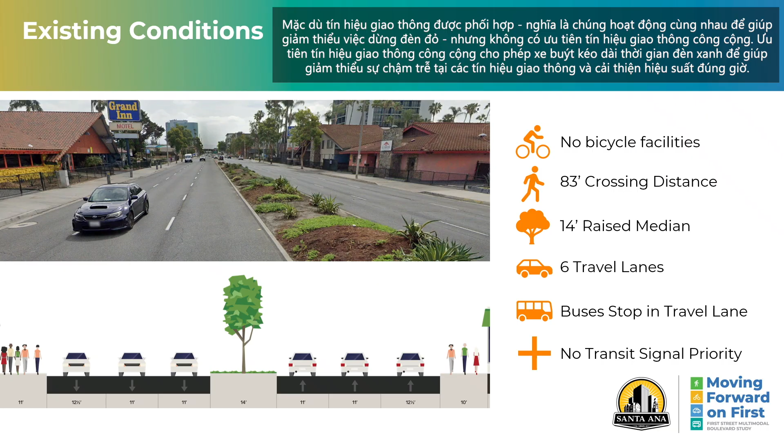First Street today is a highly auto-centric corridor. With approximately 83 feet curb to curb, there are 6 vehicle travel lanes, a raised median for much of the corridor, and sidewalks on both sides of the street. There are no bicycle lanes or facilities for bicycles. Therefore, the outside lane on First Street is currently shared by autos, bicycles, and buses. And while traffic signals are coordinated, meaning that they work together to help minimize stopping at red lights, there is no transit signal priority. Transit signal priority allows buses to extend the green light to help minimize delay at traffic signals and improve on-time performance.

Now let's look at how people travel along the corridor. Like much of California, the majority of the people who travel along the corridor do so by car. Data collected in March 2025 indicates between 20,000 and 36,000 vehicles per day travel on First Street, with the highest volume near Main Street and the lowest volume near Tustin Avenue. Posted speed limits along the corridor range from 35 to 40 miles per hour, and during the peak hours, travel speeds are at or near the posted speed limit. However, in the evening, speeds do tend to increase.

OCTA Route 64 is one of the highest ridership routes in Orange County. Based on information collected in 2024 and 2025, up to 2,900 daily boardings occur within the limits of the study area, with the highest boardings occurring in the westbound direction. Throughout the day, you will see people walking and bicycling along First Street. A review of origin and destination data for the corridor indicates that 30% of the trips made by people who live or work near the corridor are made by walking.

Bicycles account for approximately 250 trips per day along the corridor. During the data collection period, however, 85% of the bicyclists observed were riding on the sidewalk, indicating a safety concern relative to riding their bicycle in the street. And while accident rates are fairly low on First Street, pedestrian and bicycle-involved collisions account for 23% of the 479 crashes recorded across an 8-year period.

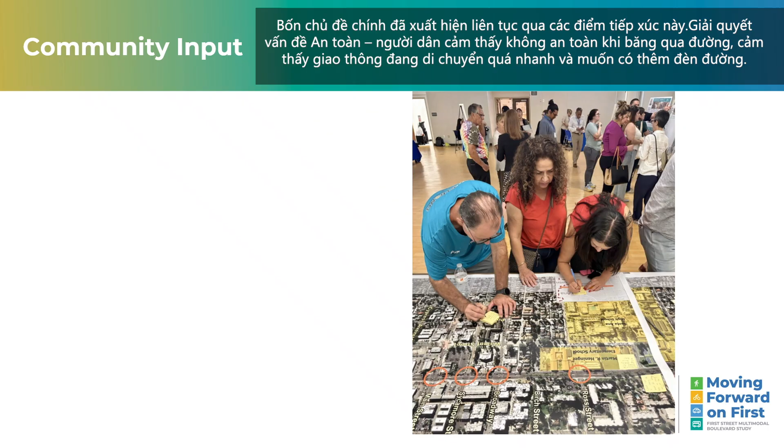Community engagement began in August of 2025 and is a key part of this project. Since the initiation, we've had 2 sets of in-person workshops, 1 virtual online workshop, attended 3 pop-up events in the community, and have initiated discussions with stakeholder groups. Consistently throughout these touchpoints, 4 key themes have emerged. First, safety. People feel uncomfortable crossing the street. They feel traffic is moving too fast, and they'd like to see more street lighting.

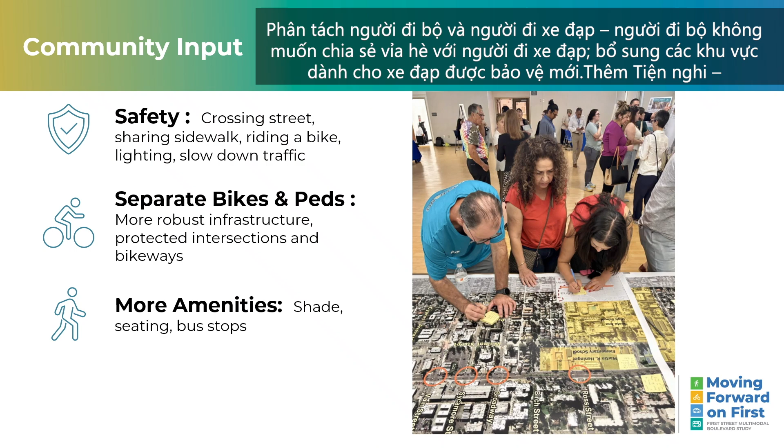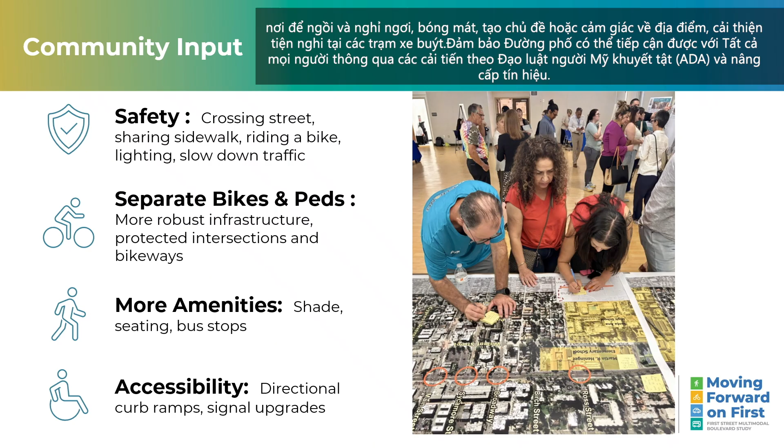Next, they'd like to see separate pedestrian and bicycle facilities. People walking do not feel comfortable sharing the sidewalk with bicyclists. They'd like to see new protected bicycle facilities. More amenities, places to sit and rest, shade. Create a theme or even a sense of place and improve the amenities at the bus stops. And then finally, make sure the street is accessible to all through ADA improvements and signal upgrades.

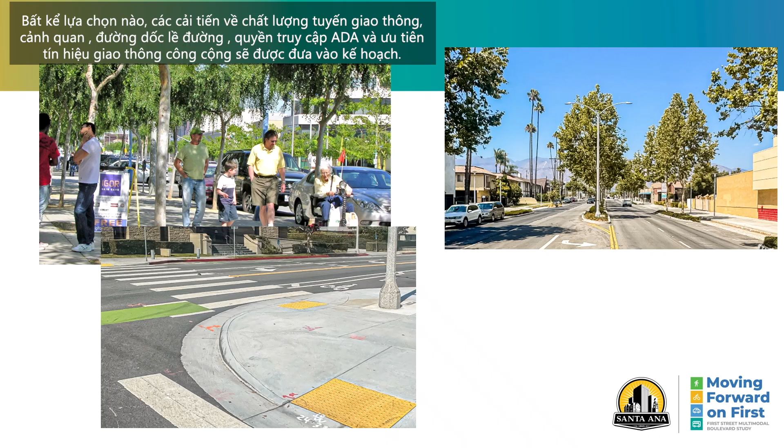This background leads us to the next phase of the project, which is developing the options. Regardless of the option, improvements to sidewalk quality, landscape, curb ramps, ADA access, and transit signal priority will be included in the plan. As I walk through the options, we're going to focus on the type of bicycle facilities and its location, whether it's on the street or at sidewalk level. We'll talk about the sidewalk location, whether it's shared with bicycles or if it's separated, and the distance it takes to cross First Street. We'll look at the number of lanes for passenger vehicles, and then we'll look at which lanes buses travel in and where they stop relative to the other modes.

So let's begin with option 1. In this option, the pedestrians have a sidewalk on the north side of the street and a multi-use path on the south side. The crossing distance is 76 feet, which is 7 feet narrower than the existing conditions. Bicycles travel either eastbound or westbound, sharing the multi-use path with pedestrians on the south side of the street. To accommodate the multi-use path, the existing lanes and median would be narrowed to 10 feet, but all 6 lanes could be accommodated.

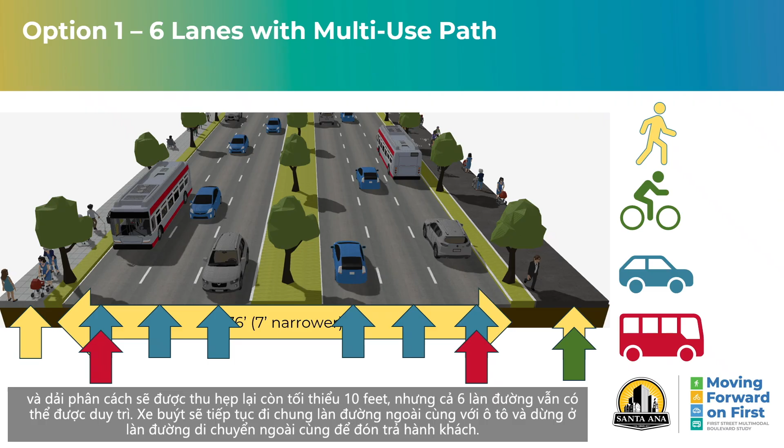Buses would share the outside lane with the cars and stop in the travel lane at stops for loading and unloading passengers. Option 2 is similar to option 1, as it provides a sidewalk on the north side of the street and a multi-use path on the south side. However, this option adds bike lanes to accommodate those who prefer to ride at street level.

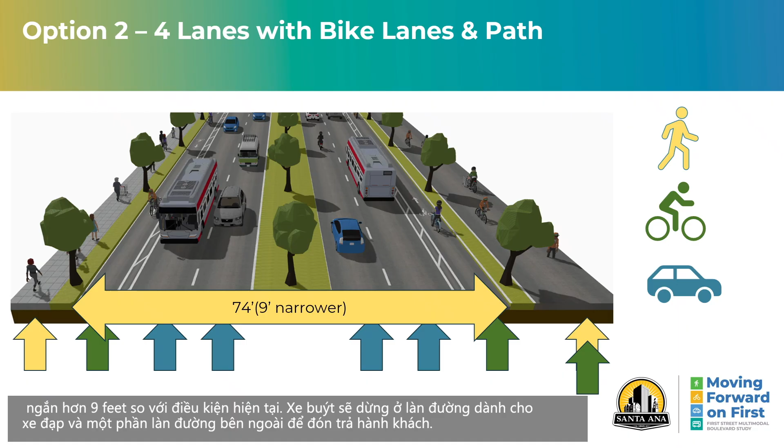To accommodate the multi-use path and the bike lanes, the existing number of travel lanes would be reduced from 6 to 4. And because there are only 4 travel lanes in this option, the distance across First Street is 74 feet, which is 9 feet less than the existing conditions. Buses would stop in the bike lane and in part of the outside lane for loading and unloading of passengers.

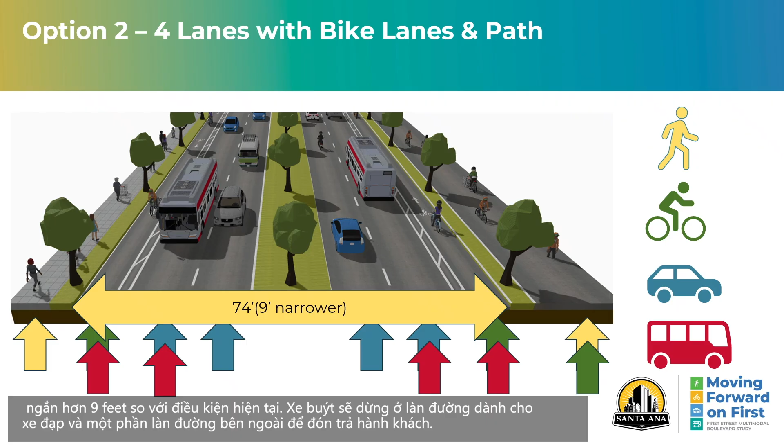Option 3 is also a 4-lane option, but rather than a bicycle lane and a multi-use path, this option provides for a directional bikeway on each side of the street, which is located at sidewalk level. A dedicated sidewalk is provided on both sides of the street. Sidewalks are separated from the bikeway by a narrow planting strip.

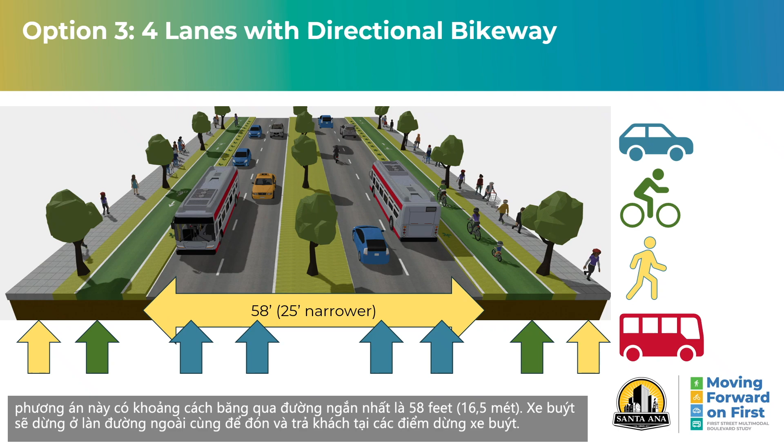And because the roadway is 4 lanes and the bikeway is at sidewalk level, this option has the shortest crossing distance across First Street at 58 feet. Buses would stop in the outside lane for loading and unloading passengers at bus stops. In reviewing the traffic volume data for the corridor, eastbound traffic is higher throughout the day than westbound traffic. Therefore, option 4 maintains 3 eastbound lanes while westbound is reduced to 2 lanes.

Consistent with the previous option, option 4 provides sidewalks on both sides of the street, and bicycles are provided a dedicated directional bikeway at sidewalk level. The sidewalk and the bikeway are separated by a narrow planting strip. The distance to cross First Street is 62 feet, approximately 21 feet narrower than the existing condition, and buses would stop in the outside lane for loading and unloading passengers.

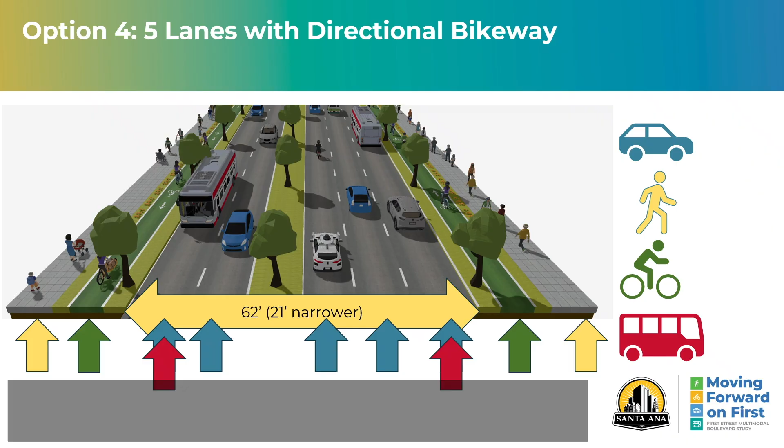Option 5 presents another 5-lane option with 3 eastbound lanes and 2 westbound lanes. The main difference between option 4 and option 5 is that both directions of bicycle travel are moved to the north side of the street. This bi-directional bicycle travel would require special bicycle signals at intersections.

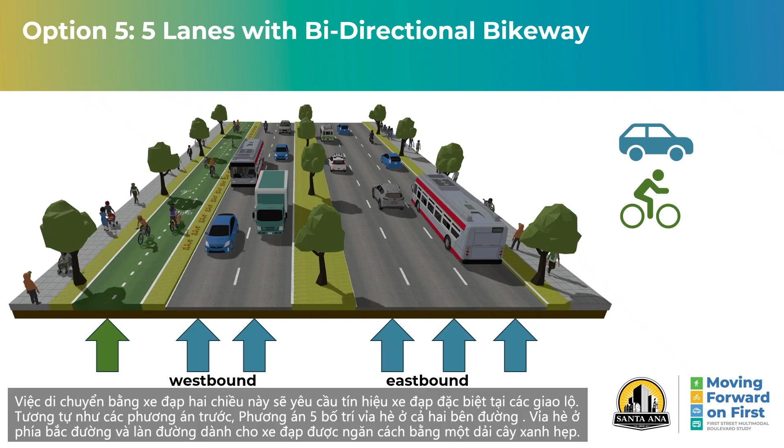Consistent with the previous options, option 5 provides a sidewalk on both sides of the street. The sidewalk on the north side of the street and the bikeway are separated by a narrow planting strip. The distance across First Street is 66 feet, approximately 17 feet narrower than the existing conditions. Buses would stop in the outside lane for loading and unloading of passengers.

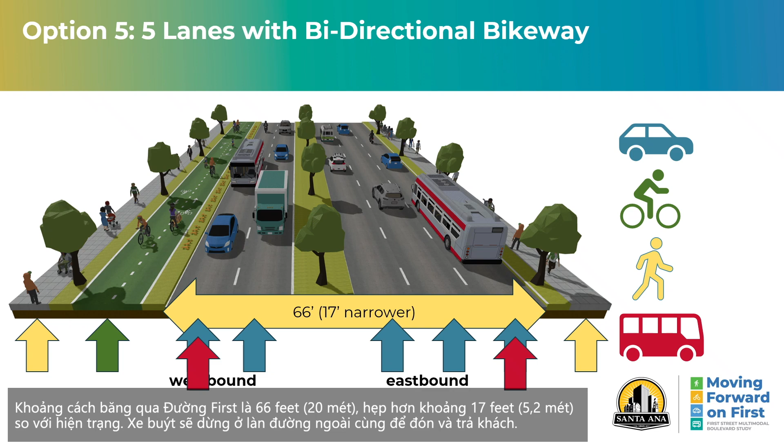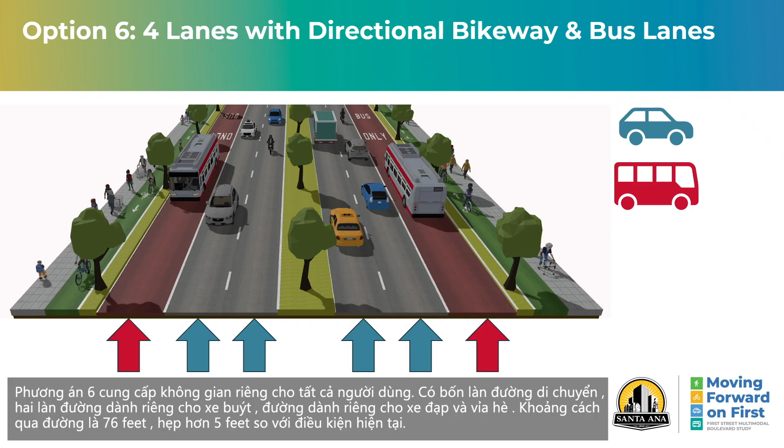The next three options integrate a bus-only lane into the corridor. Bus lanes can help improve bus operations, reduce delays, improve on-time performance, and eliminate queuing of vehicles behind buses at bus stops. Option 6 provides a dedicated space for all users. There are 4 travel lanes, 2 bus-only lanes, directional bikeways, and sidewalks. The crossing distance is 76 feet, which is 5 feet narrower than the existing condition.

Option 7 also includes 4 travel lanes and 2 bus lanes, but the bus lanes are shared with bicycles. No dedicated bicycle facility is provided in this option. The headway, or time between buses on First Street, ranges from 12 to 25 minutes. Bicycles will be able to use the entire lane when buses are not present.

At bus stops, a bypass behind the bus stop will be provided for bicycles, removing the need for them to either pass on the left of the bus or merge into traffic. This option provides wider sidewalks and additional planting areas along the curb for pedestrians and narrows the crossing distance to 78 feet, which is 5 feet narrower than the existing condition.

Recognizing that vehicular traffic is higher eastbound than westbound, Option 8 maintains the 3 auto lanes in the eastbound direction and includes 2 lanes in the westbound direction. The third westbound lane in this option is converted to a bus-only lane. Existing conditions data indicates that bus boardings are twice as high in the westbound direction than in the eastbound direction at many of the transit stops.

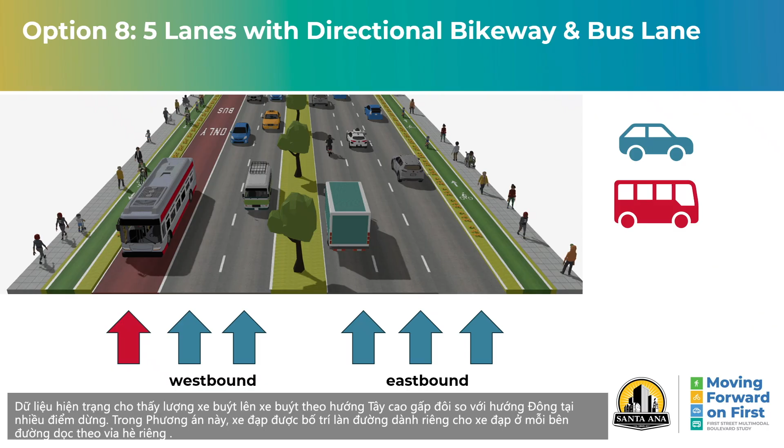In this option, bicycles are provided a dedicated bikeway on each side of the street, along with a dedicated sidewalk. The bikeway and the sidewalk are separated by a narrow planting strip. The crossing distance for First Street is 78 feet, which is 5 feet narrower than the existing condition.